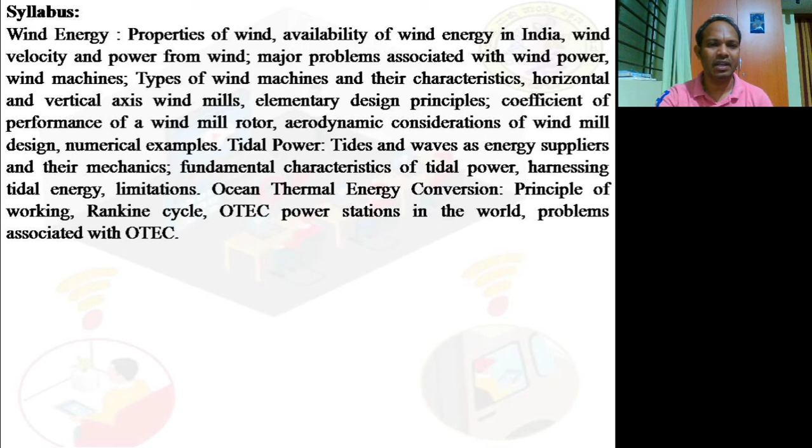Let me get into the wind energy. Basically, what do you mean by a wind? Basically, this is the difference between air and wind. Air is something which surrounds us. It's the same air which moves with a certain velocity. If it moves with a certain velocity, then we call it a wind. Air which possesses kinetic energy or a velocity, we call it a wind.

How it happens, how it is being generated, I'll quickly go through, and in detail we shall discuss it later on. Now on all parts of the earth we don't get the same amount of wind or the same wind energy, that is air with a certain velocity. It is only because of the uneven heating of the earth surface, or uneven heating of the earth and the water surface. These two reasons make the wind generate.

Now basically, the land is not flat. There will be some mountains, there will be low level lands. The air over here will be unevenly heated because of the solar radiation. When it is unevenly heated, the air above the ground level and above the higher level will get heated to different temperatures. So there exists a current flow. The hot air tries to move upwards, whereas the cold air tries to move downwards. This makes the air move with a certain velocity.

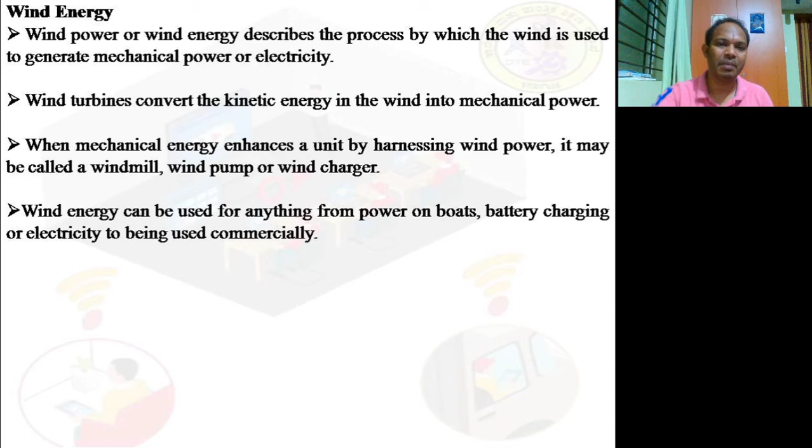Okay. What are the advantages of wind power? Wind power is cost effective. Once you make it, I agree the initial investment is more. Approximately, as I know, it may cost around 1.25 to 1.5 crores for placing or fixing one windmill above the mountains or any plains. So after this, however much it rotates, you will get electrical energy. 24/7 you will be getting electrical energy, provided sufficient wind is there to make the wind turbine blades rotate.

Okay, now wind creates jobs. It gives an opportunity for people to operate wind turbines and maintain them. Wind enables industry growth and competitiveness, because you can sell the electricity also. If you have four turbines, whatever energy they generate, you can sell the electrical energy. That is what other companies, for example Jindal company, do: they generate the electricity, utilize however much they want, and if it is more than enough, they sell it to other companies. So that is the idea behind it.

It's a clean fuel source. That means we are not burning anything; no burning and no pollution is there. Wind is a domestic source of energy. It's sustainable, which means it can be reused again and again. Wind turbines can be built on existing farms and ranches also. Not necessarily; even on the mountains or on the outskirts of the city they keep the windmills, for the purpose of wind electricity generation.

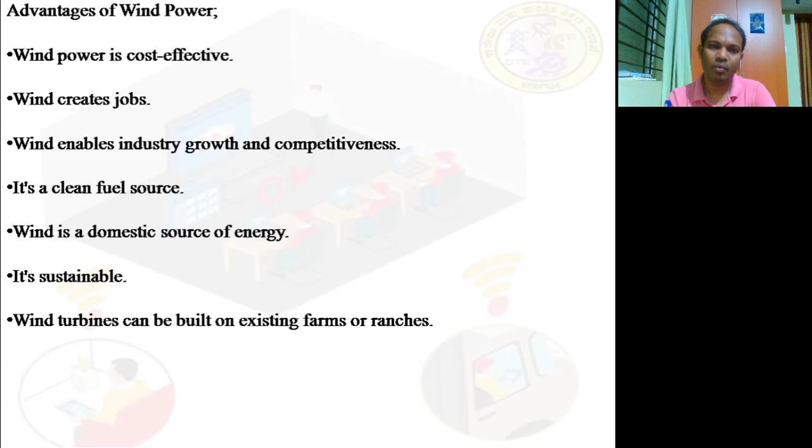It is high capacity. If you want to use a wind turbine, you can place it on the roof of your house also, which may generate electricity sufficient to use for one bulb. Based on the capacity, the size of the windmill also varies. Unlike fossil fuels that emit harmful gases, and nuclear power that generates radioactive waste, wind power is a clean and environmentally friendly energy source. Compared to fossil fuels and nuclear power, it is a very environmentally friendly energy.

As an inexhaustible and free energy source, it is available and plentiful in most regions of the earth. Exactly right. Inexhaustible means it is not exhausting. It's free of cost. No need to pay anything for the wind. Are we paying anything for the wind? No, not at all. So it is free of cost. In addition, more extensive use of wind power would help to reduce the demand for fossil fuels. Obviously, by utilizing this more and more, we can reduce the demand for fossil fuels.

Ultimately, with any type of non-conventional energy source, our main aim is to reduce the demand for fossil fuels. It doesn't mean that we are against fossil fuels. It is only because fossil fuels make more pollution and they are exhaustible in nature. So before they get exhausted completely, we have to look for some alternatives. That is the reason why we always compare with the conventional or fossil fuels, which may run out sometime in this century, according to present consumption.

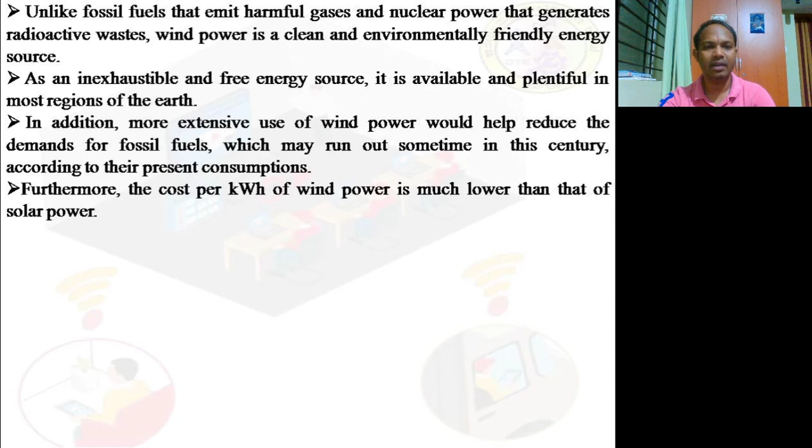Then what are the different properties of wind? Basically, wind is nothing but the velocity of air.

When I say it is a velocity, that is, it is in terms of meter per second. When I say it is meter per second, does that mean it is a vector quantity or a scalar quantity? It is a vector quantity. That means it has got both magnitude and direction.

When the wind is blowing, we say in what direction it is blowing, and with how much velocity it is blowing. So we always term it as a vector quantity because it has got both direction and magnitude. Wind has got two important characteristics: direction and speed. This is what I just want to say.

The direction of the wind can be gauged using an instrument called a wind vane. So the direction can be identified using a wind vane. My dear friends, you might have seen it even in the airports: a small conical cloth will be placed on a pole. It always shows in which direction the wind is blowing.

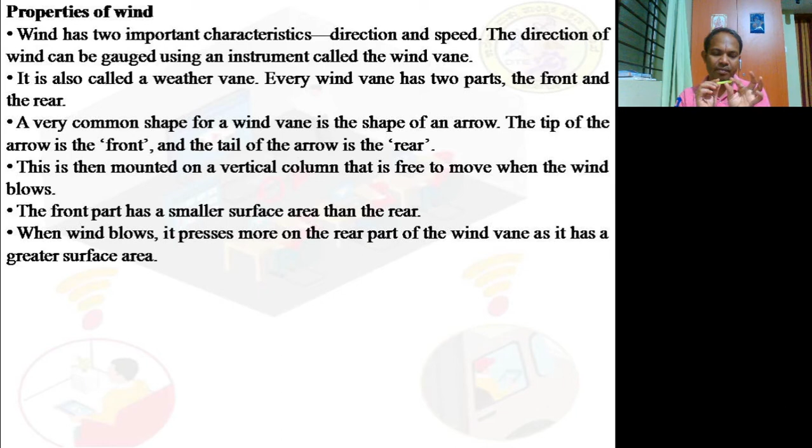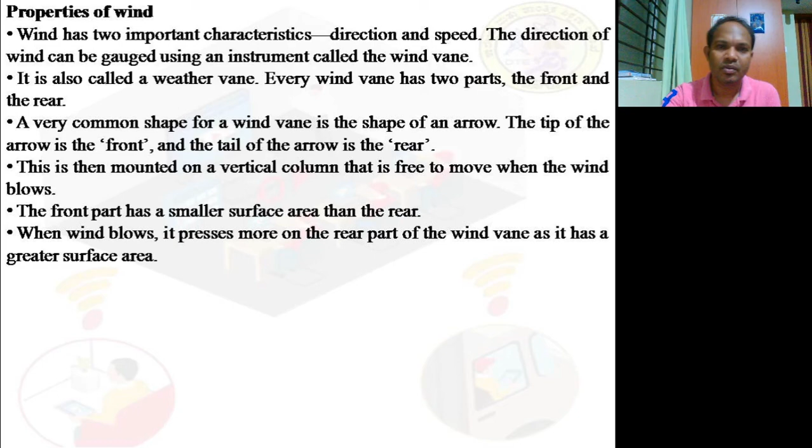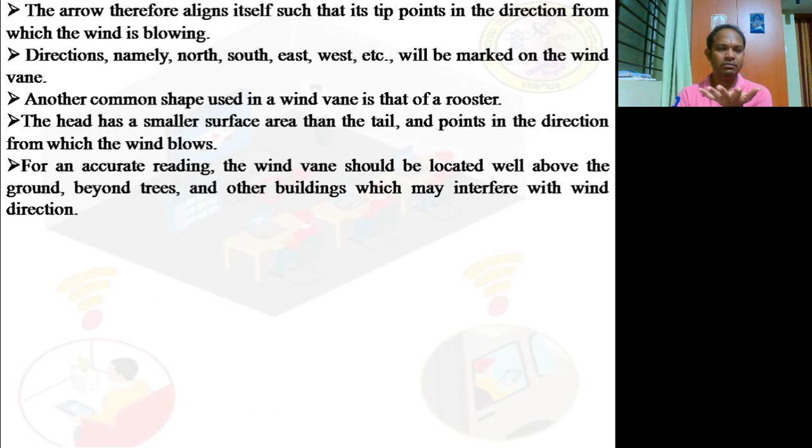The arrow therefore aligns itself such that its tip points in the direction from which the wind is blowing. Directions, namely north, south, east, west, or northeast, northwest, southwest and southeast, 8 directions, will be marked on the wind vane. There will be a small circular gauge which tells us the directions of the wind.

Another common shape used in a wind vane is that of a rooster. This is what I was just talking about. The head has a smaller surface area than the tail and points in the direction from which the wind blows.

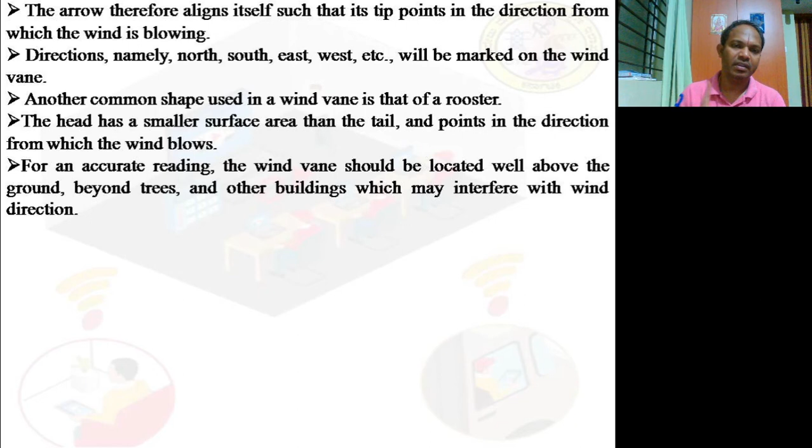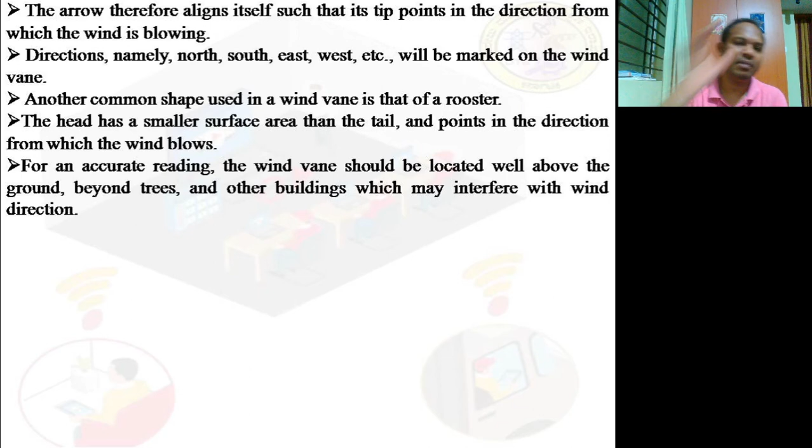For an accurate reading, the wind vane should be located well above the ground, beyond the trees and other buildings, which may interfere with the wind direction. So it is common sense that it should be free in 360 degrees, so the wind blowing against the wind vane is not restricted. Wind should blow against it freely, so that it tells us in which direction the air is blowing.

The speed of wind is usually measured with an instrument called anemometer, which are also called anemos. Basically, wind vanes are used to find out the directions, and the speed or the velocity is measured using anemometers. Anemometers are also called anemos. Anemos means wind.

In a type of anemometer called cup anemometer, there will be cups. Maybe my dear friends, you might have seen it. A series of cups will be there. If you take it like this, like a plus mark, or it may be in a cross mark, at the end of this a series of cups will be there. You might have seen it.

In a type of anemometer called cup anemometer, there are 3 or 4 cups mounted symmetrically at right angles to a vertical axis. That means if this is a pole, above this we will have a series of cups. It may vary from 2 to 3, or 4 cups, and they are placed exactly like this, symmetrically at 90 degrees to the vertical axis.

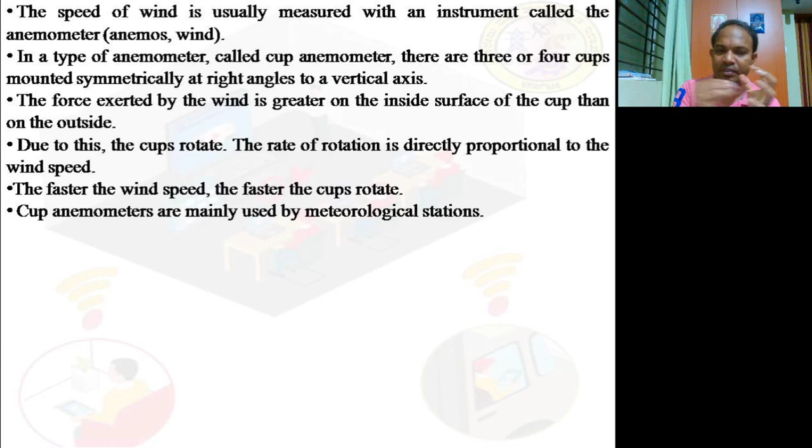Due to this, the rate of rotation is directly proportional to the wind speed. If the wind force is less, the cup speed will also be less. If the wind speed is maximum, the cup speed will also be maximum. It is placed on a vertical axis and is free to rotate. So the faster the wind speed, the faster the cup rotates. The slower the wind speed, the slower the cups rotate.

Cup anemometers are mainly used by meteorological stations. Meteorological stations, as I have already told you, deal with the changes happening in the climate or the earth's atmosphere, whether it may be wind, earthquakes or tsunamis. Any change in the atmosphere or the climate is dealt with by these stations, and cup anemometers are popularly used there.

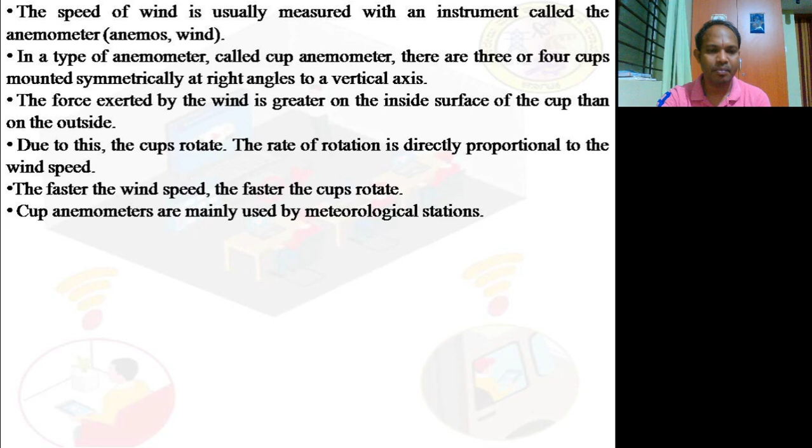Thus, this is how wind vanes and anemometers are used to find out the direction of the wind and the speed or velocity of the wind respectively. Wind vanes for the directions, and anemometers for the wind speed or velocity. These are all the different characteristics or properties of the wind.